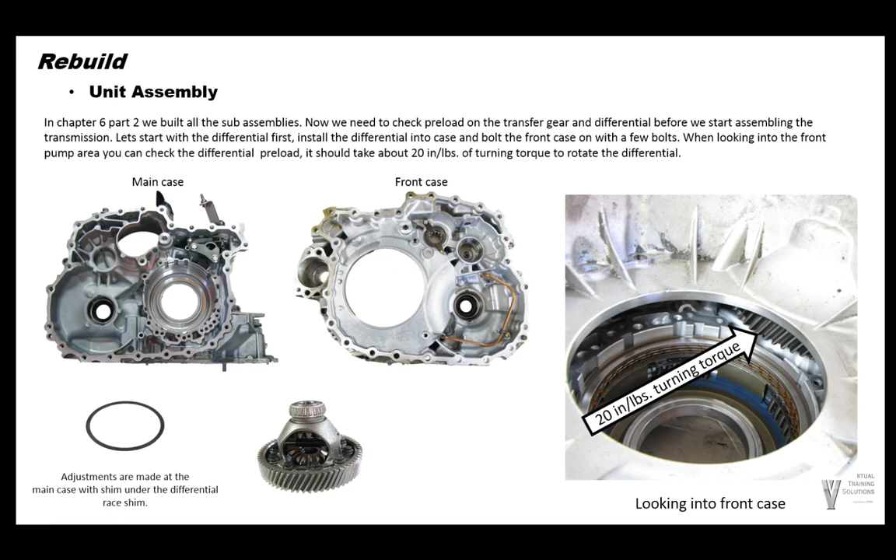Next we need to do the transfer gear. We'll set the transfer gear in here and bolt everything together. The adjustments are made in the main case right here underneath this bearing race. So let's put the front case half on the main case with just the transfer shaft in there. You should be able to reach through here and have about roughly 20 inch-pounds of turning torque.

The factory doesn't give us any of this information. This was on a few units that we have done over time, and we just took a rough estimate of what the turning torque is on these gears. You do not want end play. You don't want them too loose, but of course you don't want them too heavy to bring the gears up themselves.

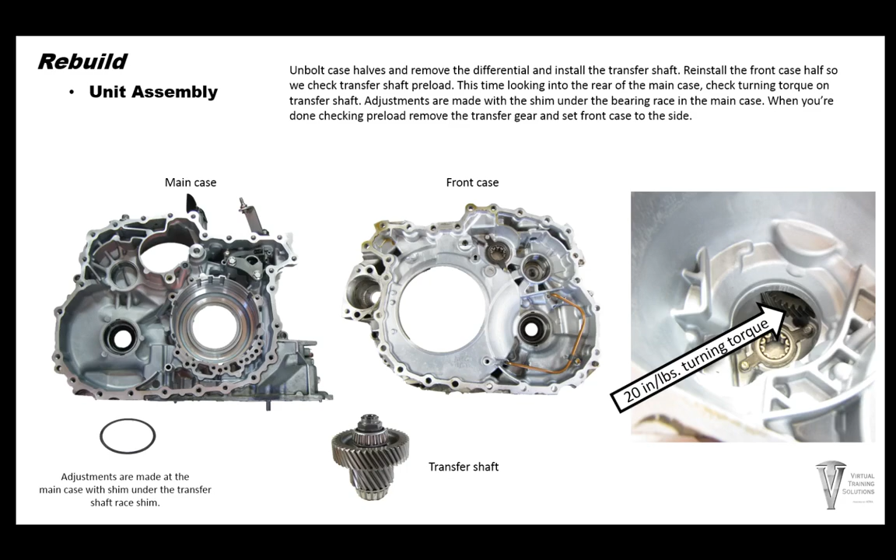We'll go ahead and pull the front case half back off. And now we're going to get to the rear pulley section.

In Chapter 6, Part 2, we put the pulley set on the rear cover. So here's what we're going to do. As you see in this picture of the belt, make sure your belt direction is the same as when you took it apart.

You have a spring seat here. The little spring seat goes down, then the spring and a cap. Push the follower down. The follower is going to go down underneath this groove right here, as you see in this picture to the right. The aluminum follower is going to ride along the side of this pulley, and then install your shaft.

We have seen some multiple different shafts here. Some are solid, some are hollow with holes in it.

The pulleys back here, go ahead and tighten your pulley bolts. You should have 12 millimeter heads on them. Also, you want to install a little O-ring, a little bit of RTV on the pulley heads here. So you tighten your six pulley bolt retaining bolts down.

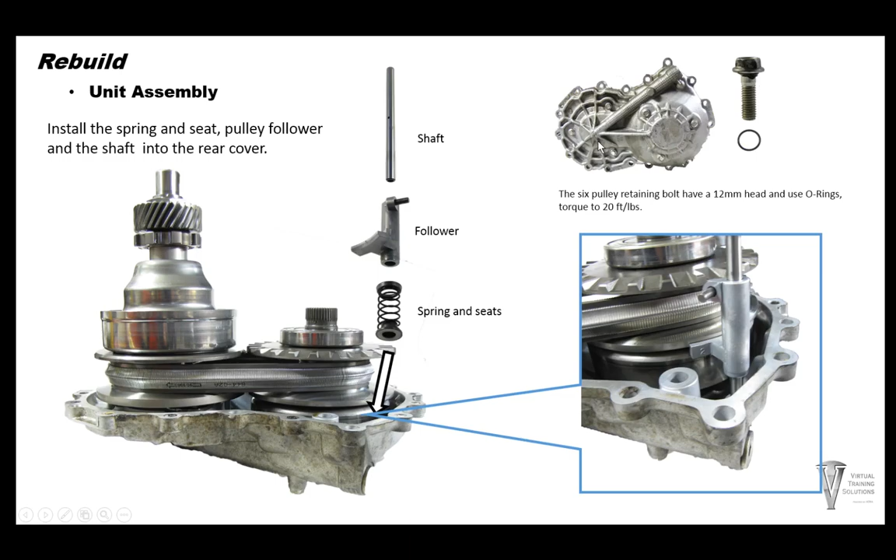We have an O-ring here in the main case, so go ahead and glue that in with some transmission assembly lube. You want to use some anaerobic gasket maker and smear that on the case halves for sealant. Some people use RTV. I personally like the anaerobic sealer a little bit better, and that's what it comes with originally.

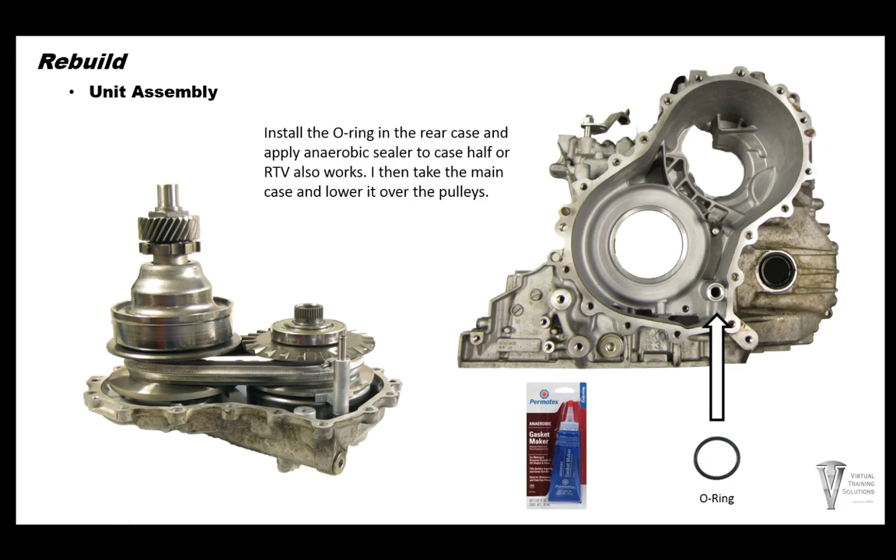Go ahead and drop your pulleys down into your main case, or sometimes it's easier to take the main case and drop it onto the pulleys, whichever you prefer. I usually load the main case over onto the pulleys and leave the pulleys laying on the bench.

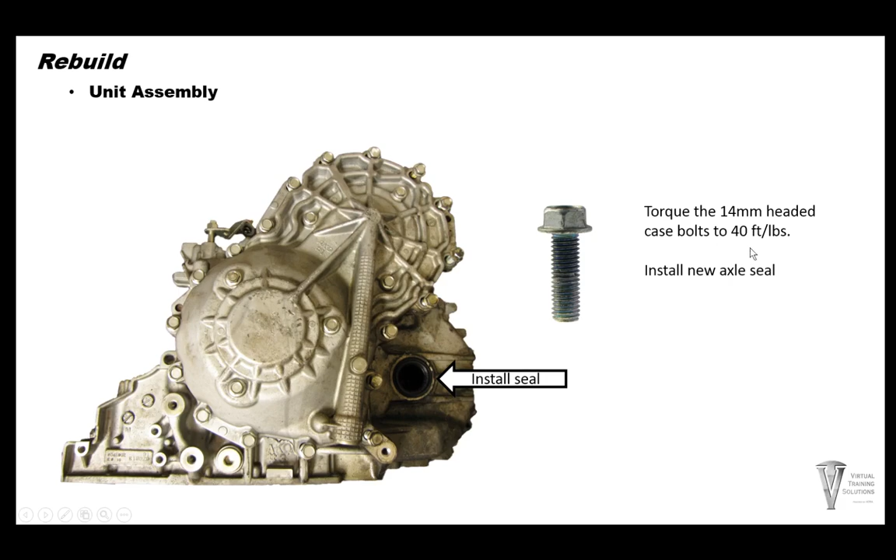Go ahead and torque all the rear cover bolts, 14 millimeter heads, to 40 foot-pounds. Go ahead and install a new axle seal.

And now we're going to flip the transmission over. As you see here, this is the pulley gear, and this is the splines of the pulley here.

So we need to drop a bearing down. All these bearings are the same and measured the same on the unit that we had. One side you're going to have all these small little holes, and the other side is going to be smooth. So I'm going to call this side the smooth side. It's going to face up, so all the little small holes in this bearing are going to go down against the pulley.

Go ahead and drop your planet down into the transmission and spline in all the clutches. Make sure all the clutches are splined in.

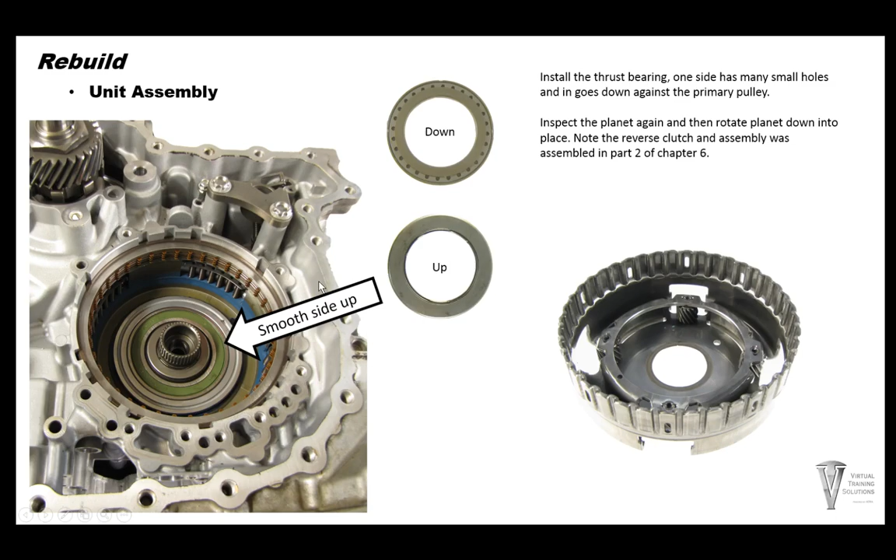Then we're going to want to put another bearing on top of the planet. The smooth side of that bearing is going to face up.

And then we're going to inspect the hub here. I want to make sure this hub doesn't have a bunch of grooves. As you see, this one here is not in the best shape. We put a clutch over there and it wasn't catching. It looked worse than it actually is, but you want to inspect for wear there.

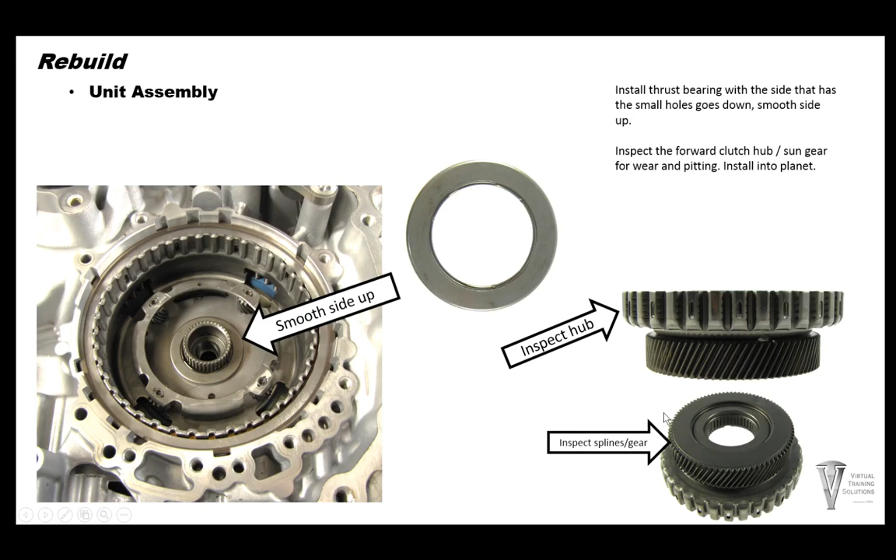Also inspect the teeth and wear on the planet sun gear too, and the splines on the inside that ride actually on the pulley. So go ahead and drop the planet hub in there.

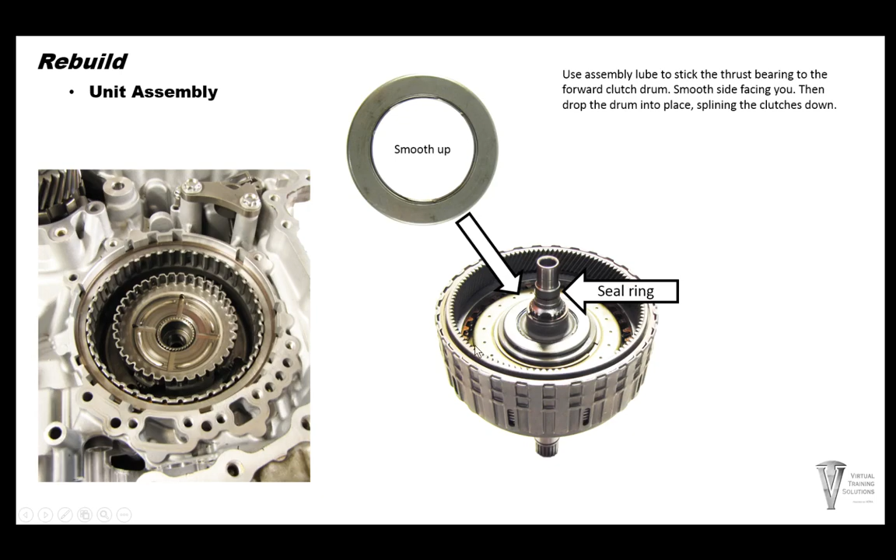And then I glued the thrust bearing on the back of the forward drum here. Go ahead and glue that on with the smooth side facing you. And then you're going to want to spline in your clutch drum. There's a Teflon seal on the shaft here, so lube that up and drop that in, make sure it gets all the way down into place.

Alright, so now we have our stack up all together. We have one more thrust bearing here. This black side of the thrust bearing is facing up, and you put the smooth side down onto the drum itself. Go ahead and set up your H gauge here. I got an H gauge set up on the pump flange, and then the pin down against the bearing itself.

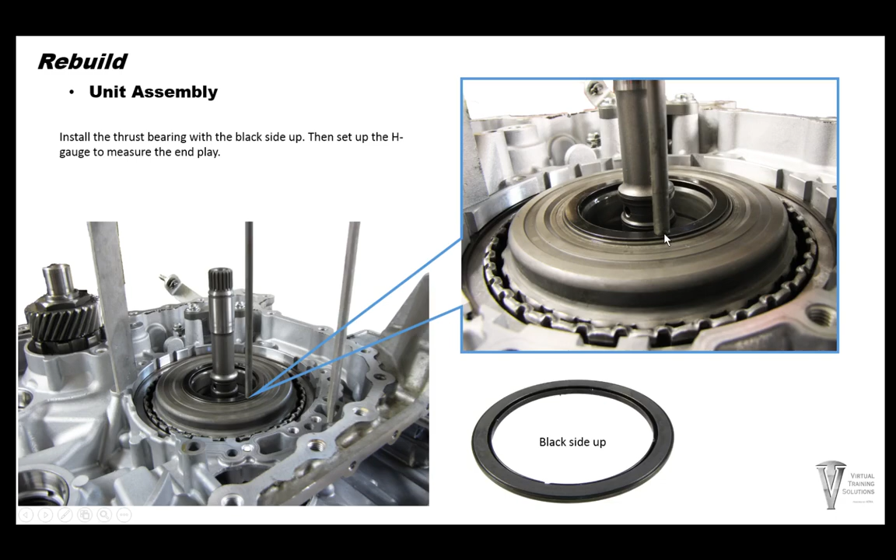I'm going to go ahead and flip the H gauge over and measure the clearance in between the pump and the H gauge pin. This one had 25 thousandths clearance. Don't see any adjustable shims in this unit either.

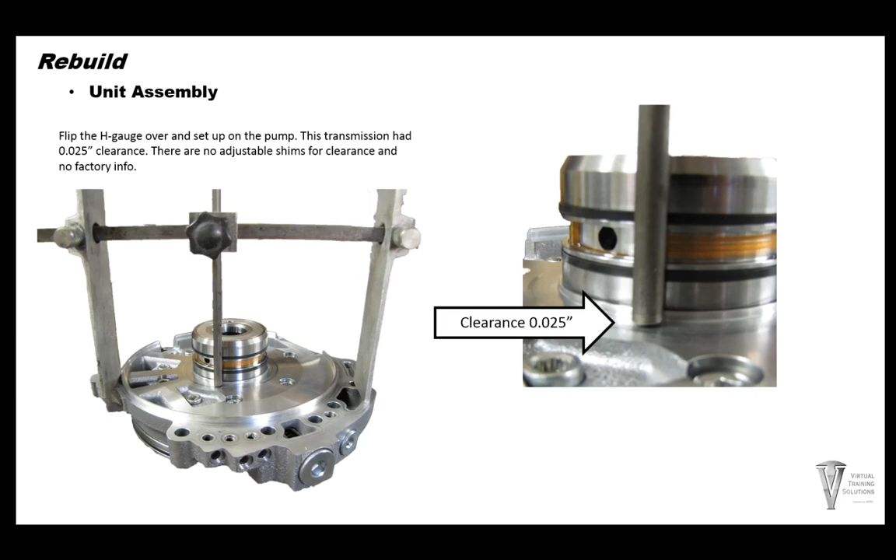Install a new front seal and the O-ring and the pump gasket. Of course, flow control valves and all that stuff like in the other section. Inspect your pump bushing. All that's already been done and torqued down. So install the new gasket and torque the pump bolts down to 20 foot-pounds.

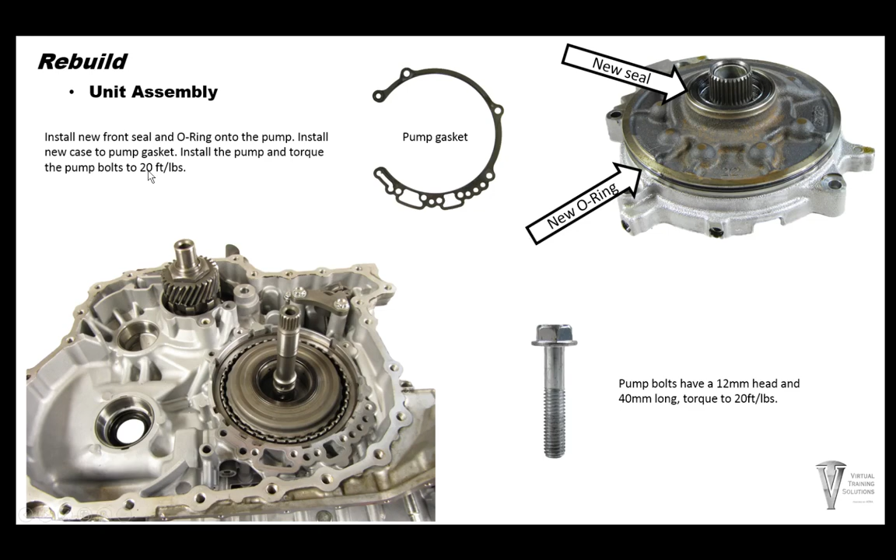After the pump's torqued down, go ahead and install the O-ring on the input shaft. Slide your differential in, then go ahead and slide your transfer gear in.

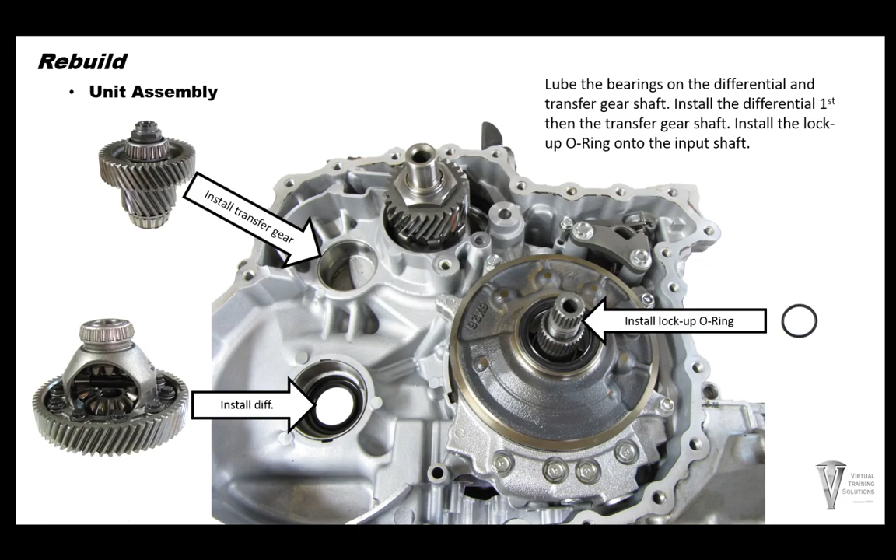Now we're working on the park mechanism. Go ahead and put the park pawl down in, your pin in. Oh yeah, forgot the spring. So the short end of the spring goes down against the case, and then you're going to put your park lever down over that, and the end of the spring is on the case side here. So this lever is being pushed downwards, pulling the park pawl out of the gear.

Make sure you put your park pin in, and if you have this funny looking roller left over on the bench, it goes into the case right here, the corner of the case, and it keeps the shifter rod from moving in and out or up and down in the transmission. It's just a little pin, slides down next to the rod to keep it in place.

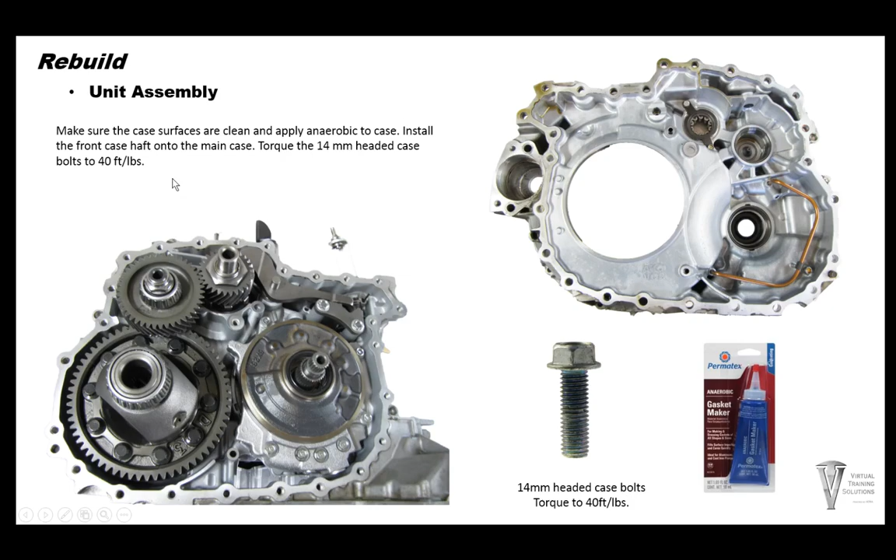Go ahead and use some more anaerobic sealer on here. Lube up your bearings, and then go ahead and drop your case half onto the front here, or the main case. Go ahead and torque all the case bolts to 40 foot-pounds.

Put a new O-ring on the primary pressure switch. Go ahead and screw that into the case and torque it down to 12 foot-pounds. Want to put some new O-rings on your electrical connector here, put that into the case, and put the clip in from the outside.

Under the valve body here, there's 2 case seals, so we want to put those both up in place and glue them into place.

And also like to do a kind of an air check here. Reverse clutch here, you want to go ahead and air check that, of course. Forward clutch, you're definitely going to want to air check that. Primary pulley and secondary pulley, you can air check those. It's not going to be like your normal drum air check.

It is a good idea. They should be fairly airtight. Some will move the pulley and some will not move the pulley, depends if it's rotating or not. Not a huge fan of the primary and secondary air check, but it's a good idea to still do it and get used to what they do sound like.

If you put oil in them, make sure you use the correct oil. Don't just dump ATF in there to do an air check. You'll want to dump in your Nissan CVT fluid oil in there for the air test.

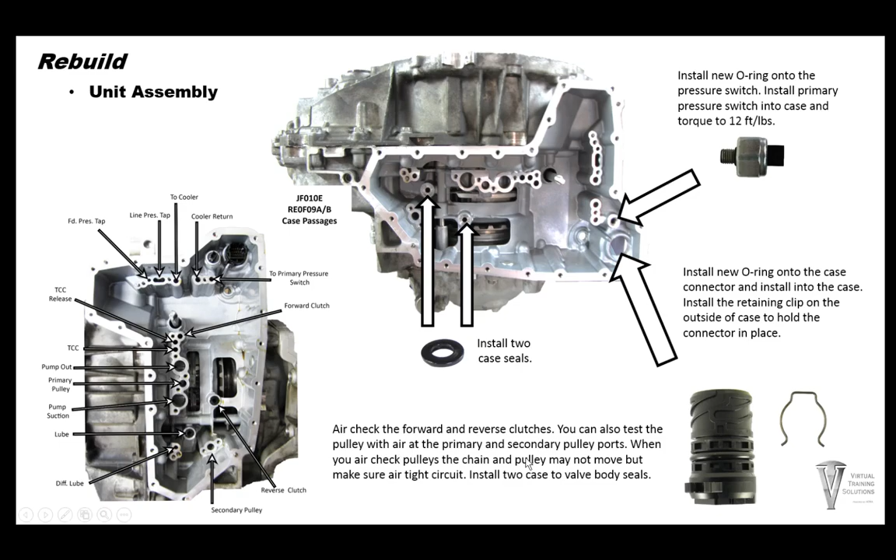Yeah, we got the valve body ready. Here's the stepper motor and the ratio arm. This ratio arm, this little U seat here, needs to line up in the pin. So this pin and follower is what was in the rear cover, and this is what the ratio control arm rides on. So as you put your valve body in, make sure this lines up to the pin.

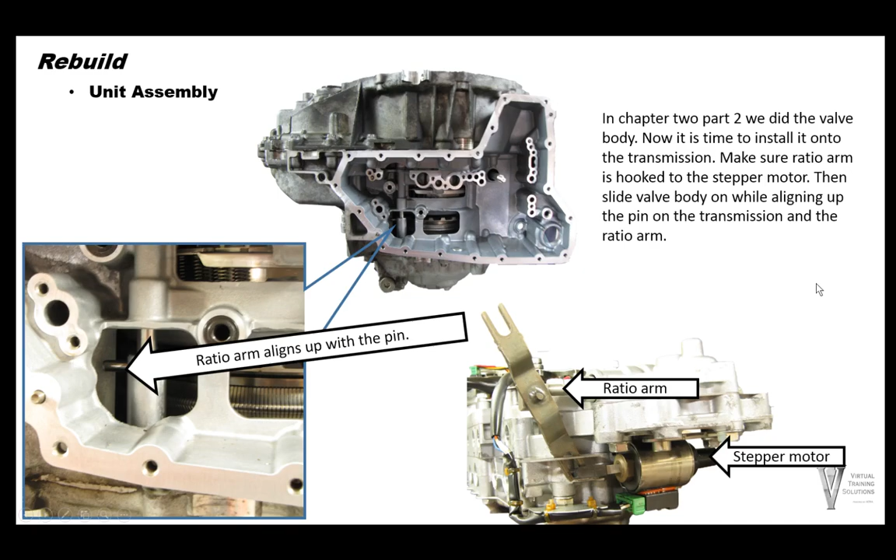So now we have a few different bolt lengths here. A is 30 millimeters long, B is 53 millimeters long, C is 69 millimeters long. Go ahead and slide your valve body in. Make sure your ratio arm is lined up here.

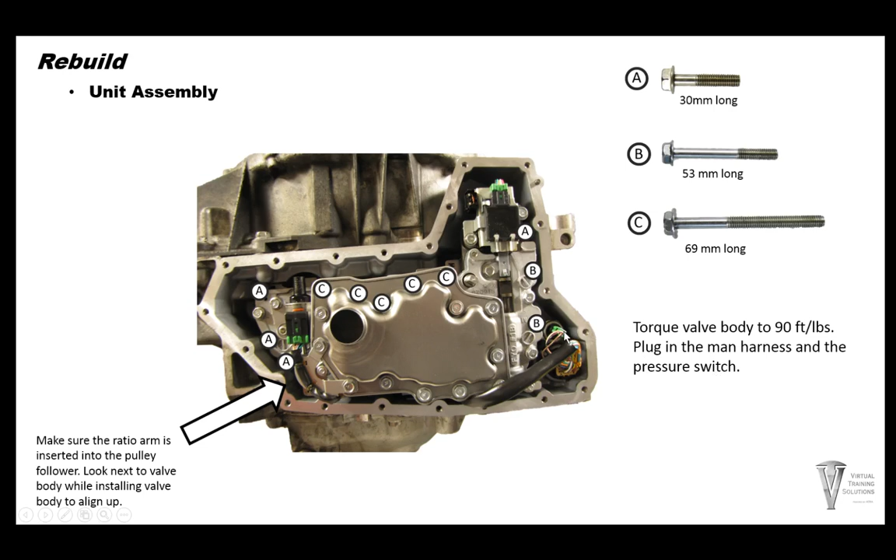Make sure your wiring's not pinched up underneath here. Torque your valve body down to 90 inch-pounds. 80 to 90 inch-pounds is just fine. And then plug in your electricals into the main case and your primary switch here.

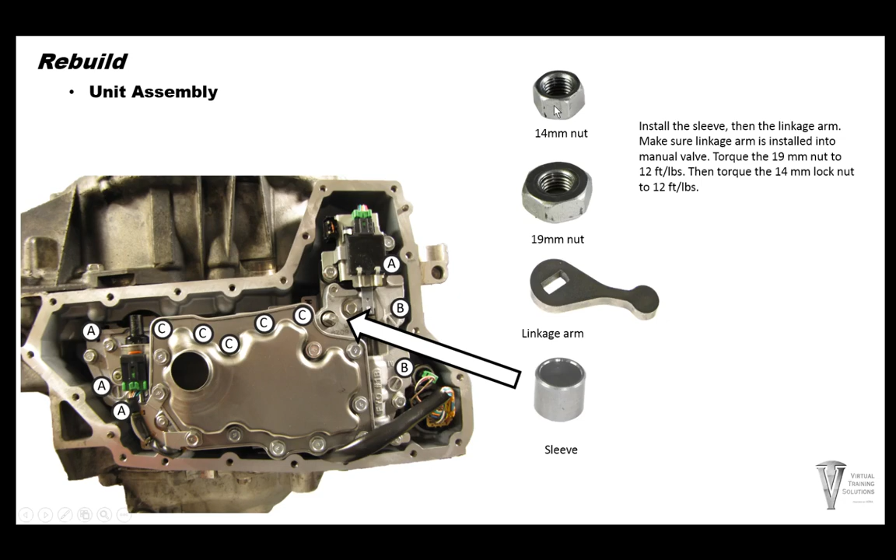Go ahead and put the linkage sleeve down in, your linkage arm. This arm can go either way. There's not a right side or up or down, they're both exactly the same. Go ahead and torque your 19 millimeter nut down to 12 foot-pounds. While holding this 19 millimeter nut, torque your 14 millimeter lock nut down to 12 foot-pounds also.

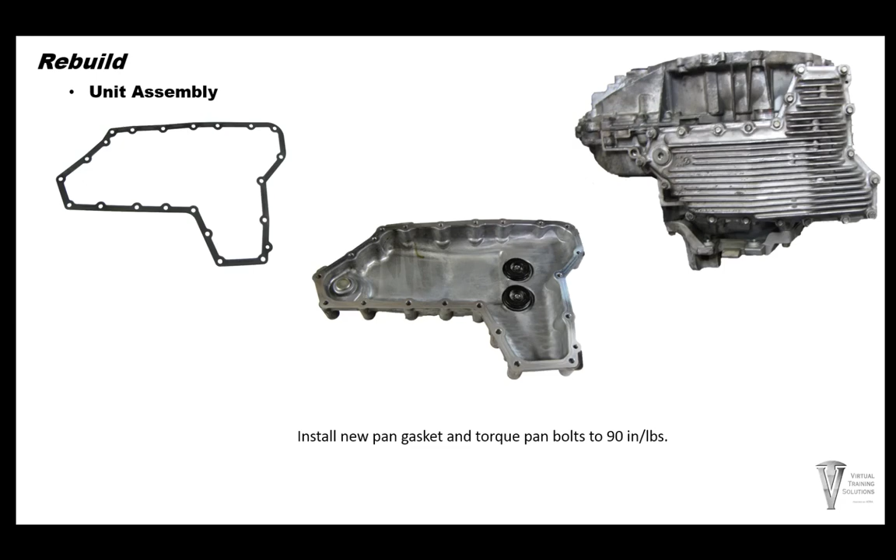Go ahead and install a new pan gasket and torque the aluminum pans down to 90, and the steel pans we are doing down at 50 to 60 inch-pounds.